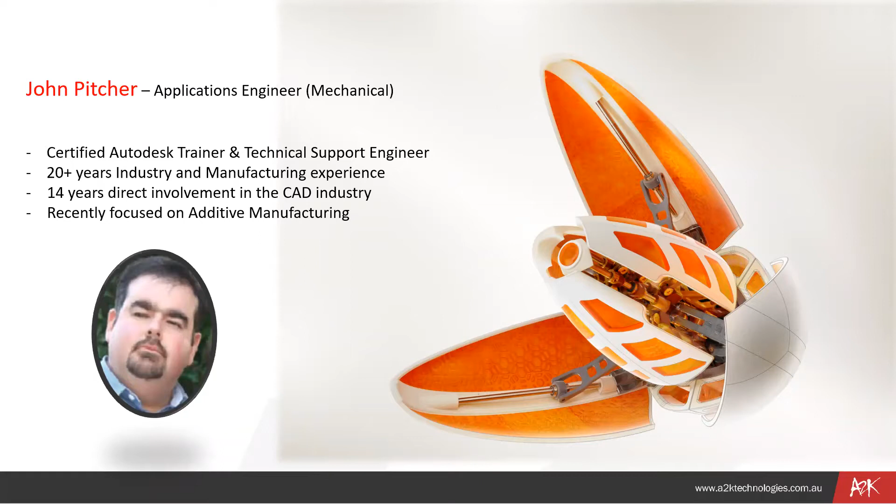My name is John Pitcher, and I'm a tech support engineer with A2K Technologies. I'm a certified Autodesk trainer and tech support person. I spend a fair portion of my day doing this sort of webinar and also training on a number of the mechanical suite of products that Autodesk have provided to the marketplace. So today's webinar is around the subject of Fusion 360, Automate to reduce delivery time. It's great to have you along, thanks for tuning in, and we look forward to spending some time on that particular topic.

So just a couple of other things about me. I've been working in this industry for about 15 years now. Prior to that I was in the manufacturing industry, I did an apprenticeship as a fitter machinist many years ago, and worked in manufacturing for about 10 years also, in various aspects including CNC programming, setting, and manufacturing components. I worked in hydraulics and pneumatics and machine tool design. For the last 14 or 15 years I've been working with the Autodesk line of products, and more recently I've spent a bit of time around the additive manufacturing side of industry for 3D printing, particularly interested in the products available for 3D printing componentry suitable for manufacture. So that's just a little bit about me.

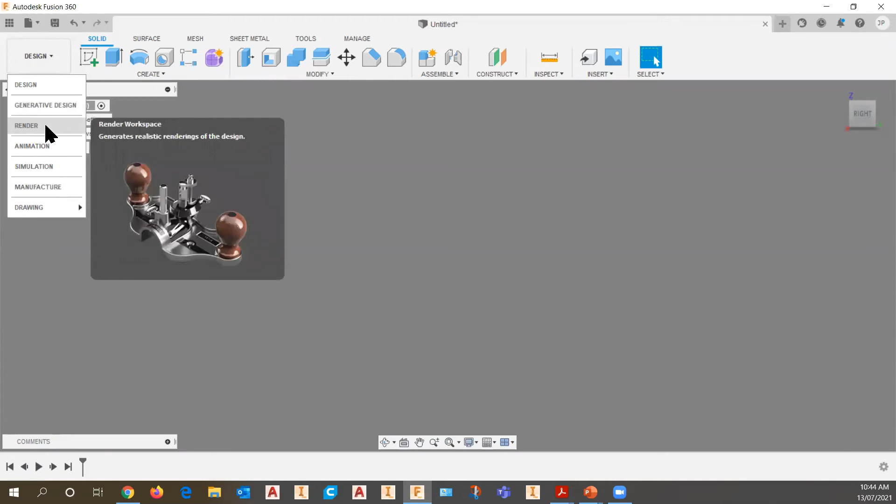For those of you that haven't seen the Fusion interface, I'd encourage you to go and watch some of our other webinars. We've done webinars on various aspects of these different environments - the design environment, generative design, where we talk about doing some studies on our traditional methods of design and how we might work with that. We haven't done one on rendering yet, but that's something we might do in the future.

Animation - we can explode an assembly apart in the animation environment within Fusion. We've also got the option for simulation studies, where we can go and do some stress analysis and stress testing inside the system. And we've got the manufacture option, where we've got the option to go in and do some tool pathing for a CAM system.

That's another aspect of Fusion you might like to consider. One of the other areas, the last option down there, is for drawings, where we can go and create a drawing from our current design or from an animation as such. We've done numerous other discussions on various aspects of the Fusion interface, and hopefully those of you that have seen those already have found them beneficial, but I'll perhaps link some of those into the chat at the end of today's session, and maybe share those with you as well.

But like I said, the real focus for today is looking at what we call these add-ins. The add-ins aspect of the Fusion space is quite powerful. There's a lot of things we can do in here, and the purpose of today isn't really to go and write code or anything, but just to give you a bit of insight into how you might get involved in this and some of the other aspects of that.

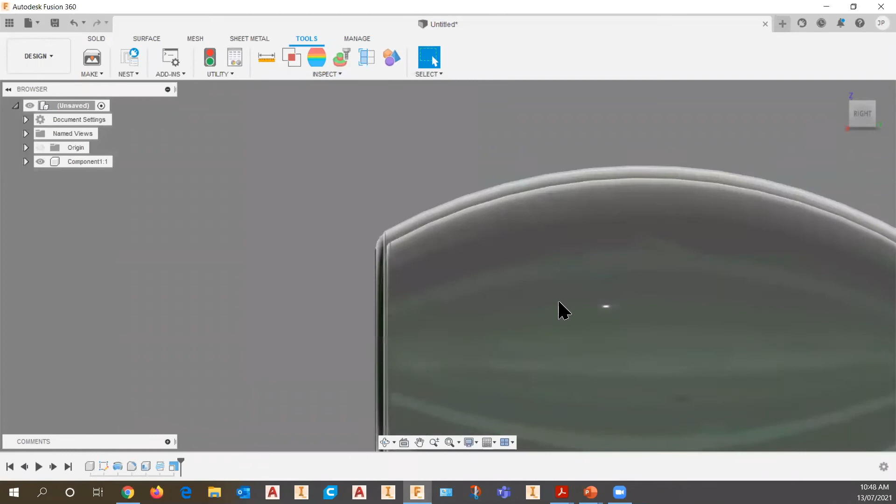Some of these are quite good just to explore and have a look at what's available, and breaking some of these down would be a way of seeing how we might create our own add-ins for Fusion to make it function a little more appropriately for us. For instance, if we grab this script called bottle, select it, and run it, basically some person has kindly created a little 3D bottle for us.

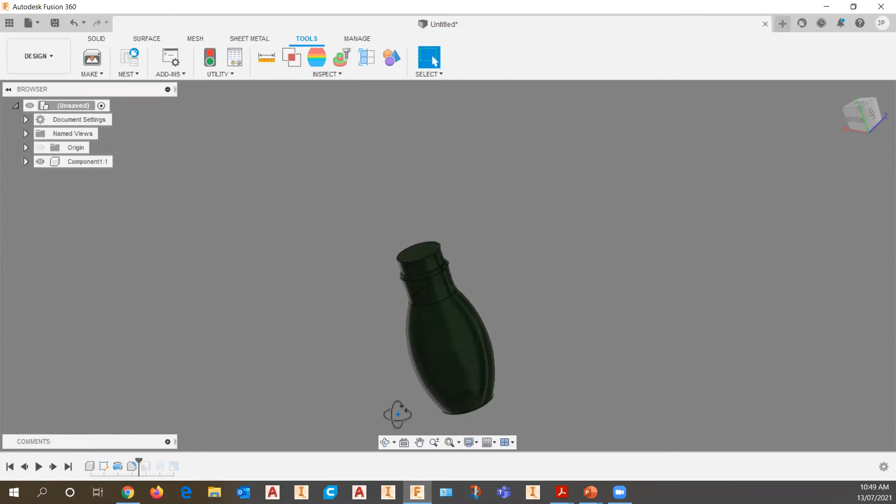So here's an example of what you might create with a script. Rather than having to go and create all of these features, we've got the timeline in Fusion that shows us how this part evolved. Whoever created this part made a revolved shape, then added a shell to hollow the bottle out, and added a thread to the neck of the bottle, and so on. That's how this bottle was created, but I was able to make it in seconds because we just ran that script.

It's certainly worth having a look at these. They're very simple to run. Normally we just select the option and pick the run option down here, and Fusion will go off and build that particular feature for us.

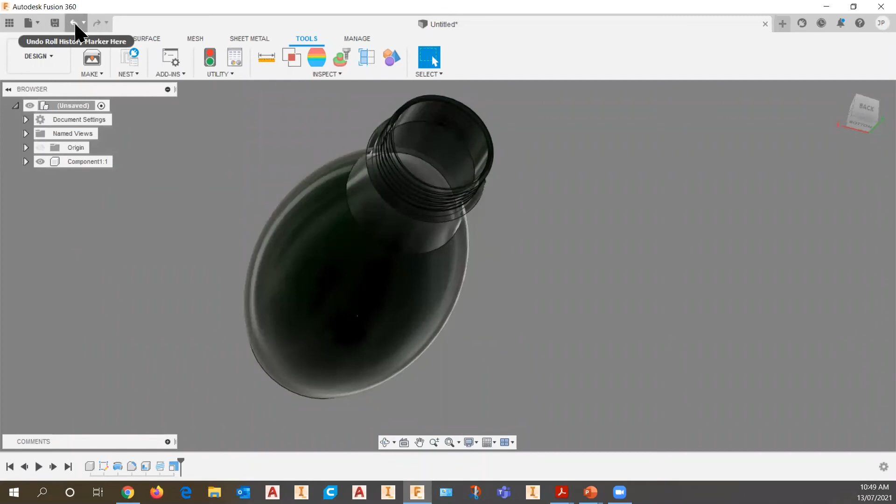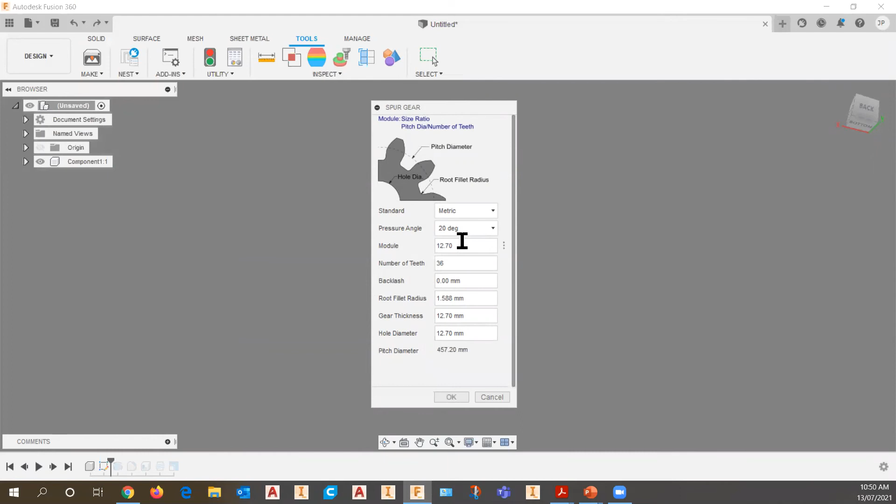Now maybe I'll back out of that and show you one of the others available here. Again, under scripts, if we pick up this spur gear, we've got a couple of options. If I click run, Fusion presents a dialog where we can enter the parameters, like how many teeth we want in our spur gear, the pressure angle, the diametral pitch, and all that good information, set up here in the table. When we click OK, Fusion creates a spur gear for us with the requested number of teeth.

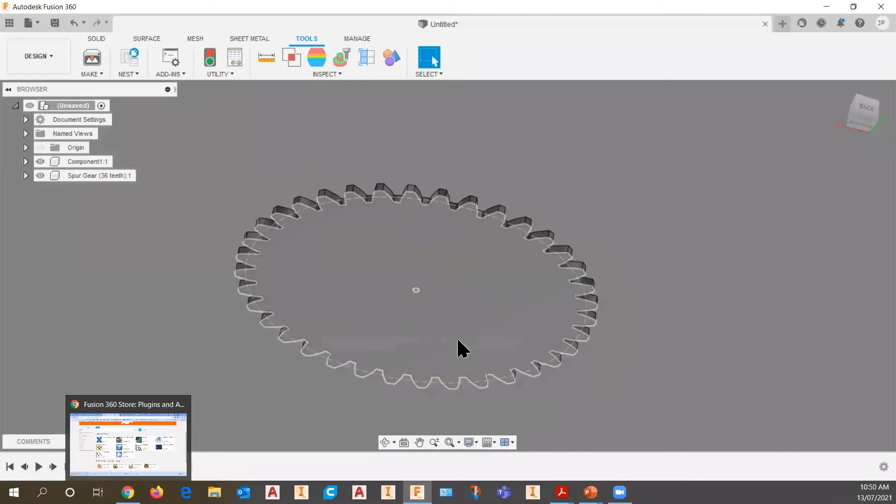So they're quite powerful little tools. To model that manually, you'd have to draw the tooth profile, get your correct geometry, then pattern that around a circle. But under the add-ins area here, we've got these options available to us.

Now we can quite simply create our own, and when we jump in here to create one, you'll get an option to either create that in the C++ language or in the Python language. We can give it a name, then create our code and go off and build that particular item. Really creating these isn't rocket science, it's just a matter of following a process, and with Python especially, quite simple to learn—the uptake is very short, a short learning curve that we can go through and work with.

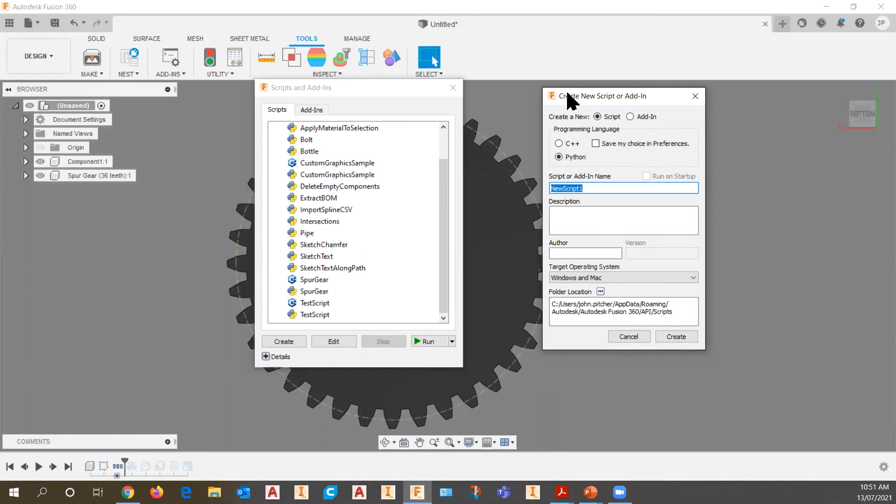So really the whole concept of running these scripts or add-ins in the background of Fusion just allows us to cut out some laborious tasks. For instance, if you traditionally start your modeling process as a product developer, and a lot of your items are built around some sort of conveyor system, you could create a script that built a conveyor, and then create variations within that design—various lengths and widths for the conveyor system, speeds at which it travels, or a whole bunch of different options available when creating the code that would let us work with the Fusion interface.

So I guess the long and the short of this, guys, it wasn't our purpose today to run through the whole process of this, but just to give you an idea as to how we can run some of these scripts and add-ins and utilize them.

Like I said, the great thing about Python is you'll find there's a lot of already created content on the World Wide Web, so certainly worth searching around first before you go and create something, because you may find somebody else has happily created that and is willing to share it with you.

So look, lots of different options there for working with these scripts and add-ins. I'd encourage you to have a look at this. It's not rocket science, but certainly very clever functionality, especially if you've had exposure already to either C++, which is a more traditional, older system of creating code. But now with the Python language, we've got a lot more versatility, and a lot of students in college learn how to write code in Python. It's very common and quite a standard system now being used globally for these functionalities.

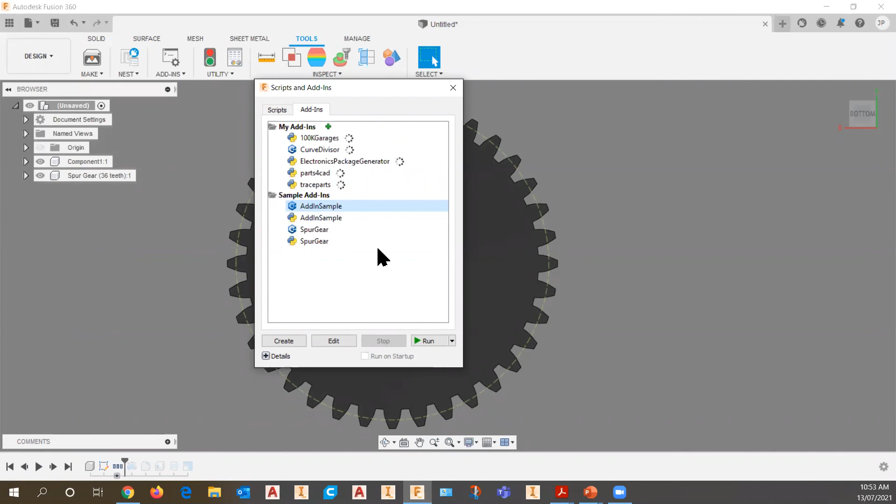So yeah, many options there for working with that. Basically, these scripts or add-ins get saved to your local drive so we can go in and work with them. I mentioned before this one that I downloaded from the net called the curve divisor. Effectively what we can do with this one, and again, I'll just back out of the spur gear.

If I was to create a new sketch, let's say I just wanted to do a sketch on this plane, and we'll just draw a quick spline line. Okay, now like I said, in AutoCAD, most of you would be familiar with the break at point and divide command, where we can add a series of points. Sadly, Fusion doesn't have this in its standard interface.

But what you will notice, once we run that add-in called curve divisor, which is what I picked up from the App Store that I showed you earlier, I've run that already on my system. So you'll notice that when I go to add-ins, I've got curve divisor loaded now, and it's ready to be able to use.

But effectively, all we need to do now is go into the sketch environment and pick the curve divisor option. We pick the spline and then tell it how many points we want along the spline, for instance. And what this piece of code does is simply divide up the length of the spline into 6 equal lengths, if you like. And we've now got that divided.

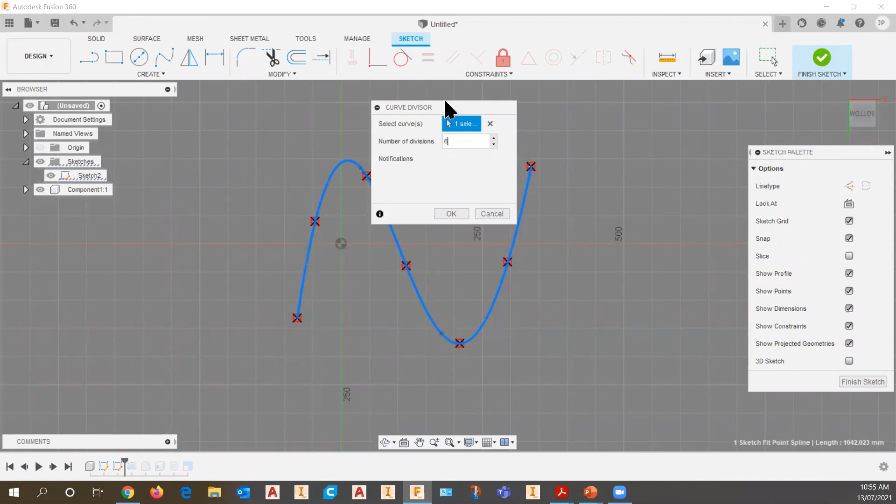So again, just as a bit of an example of one that most of us would be familiar with if we used AutoCAD, is to be able to put points along a curve at a set increment. So yeah, that's just one little example of one of the add-ins that's available to us from the App Store.

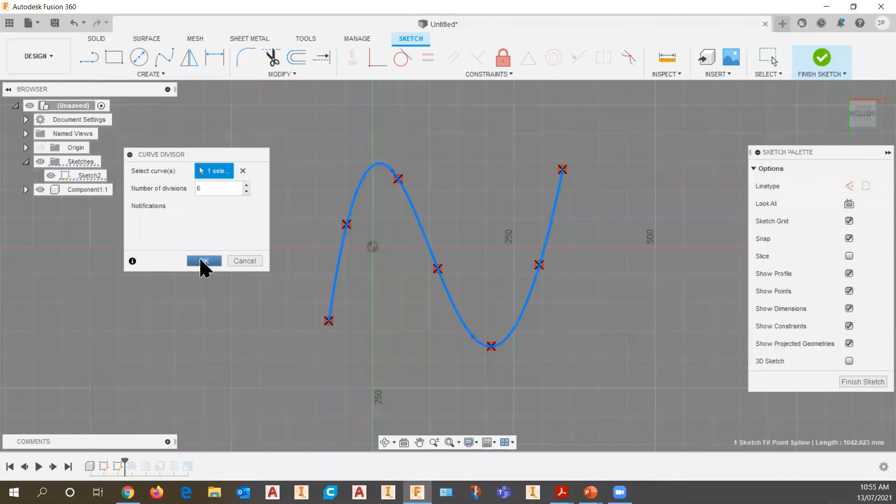Okay, so really, I guess, the purpose of today was just to explore and give you a bit of insight into how we can work with these scripts and add-ins and how we can use that.

And look, what I'd like to do in closing is mention one other gentleman that has done a lot of work on this, by the name of Patrick Rainsberry. I'll pop a link to his training. He goes through some other elements of working with Fusion and its add-ins, and steps through the process of creating a basic piece of code you might like to explore and have a look at. I would just like to acknowledge Patrick as a person that's done a huge amount of work on this, and he's done some classes at AU. I'll pop the link to his AU class, which I would highly encourage you, if you do want to go this track, really worth having a look at.